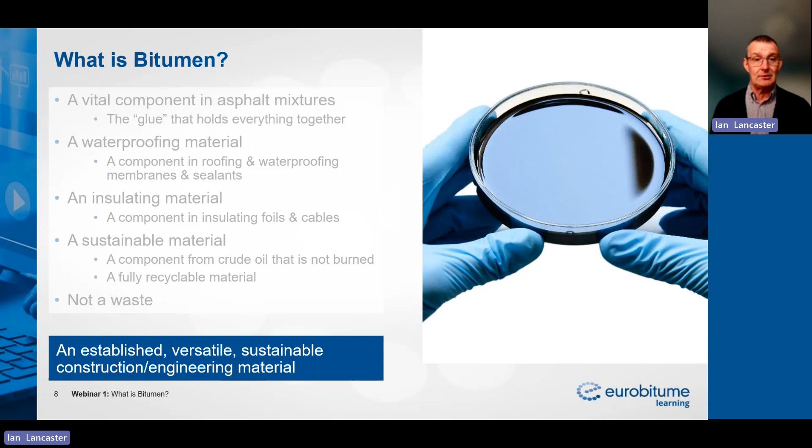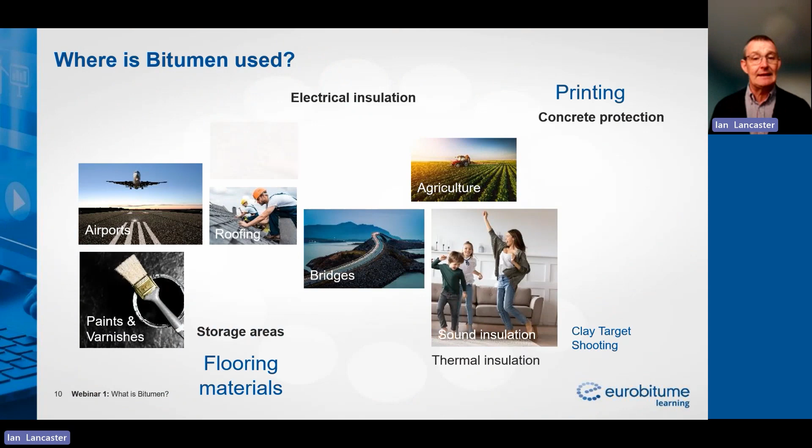Now I want to give you a flavour of where bitumen is used. I've already touched on some of the big uses of bitumen in paving, roofing and waterproofing membranes, and insulation. But you may be surprised just how much bitumen there is out there, where it is, and the sorts of materials that it goes into.

So yes, paving and bridges, a huge use of bitumen. Airport runways and standing areas, again, paving. We've mentioned roofing felts and flooring materials, but also sound insulation and pipe coating - bitumen provides fantastic levels of insulation for undersea pipelines, giving thermal insulation. It can be used as a briquetting and agglomeration material so we can compact wastes. It's used in wood protection - one of the very earliest uses of bituminous binders was to protect wood. So it's absolutely all around us, this fascinating engineering material. Everywhere you look around you in the environment, you will find bituminous products absolutely everywhere.

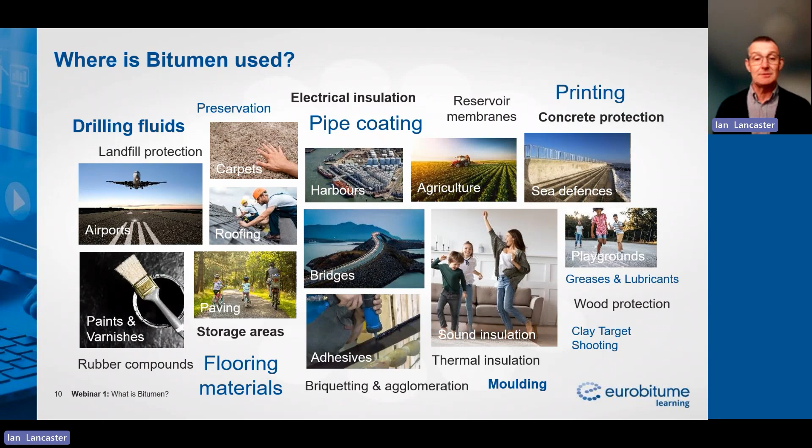But if we drill down a little bit, you can see just exactly where the big volumes of bitumen are, and that is in paving. It's approximately 85 to 88% of the total global bitumen demand goes into paving. And again, that reinforces the credentials of bitumen as a sustainable construction engineering material.

Roofing is the next highest consumer, roofing and waterproofing. And then we have those very niche applications that we saw in the slide previously, things like agglomeration, printing, pipe coating, wood preservation, even agriculture. But by far, the biggest single use of bitumen is in production of paving materials, whether that's surfacing materials or subsurface materials to give the road its strength and its engineering properties.

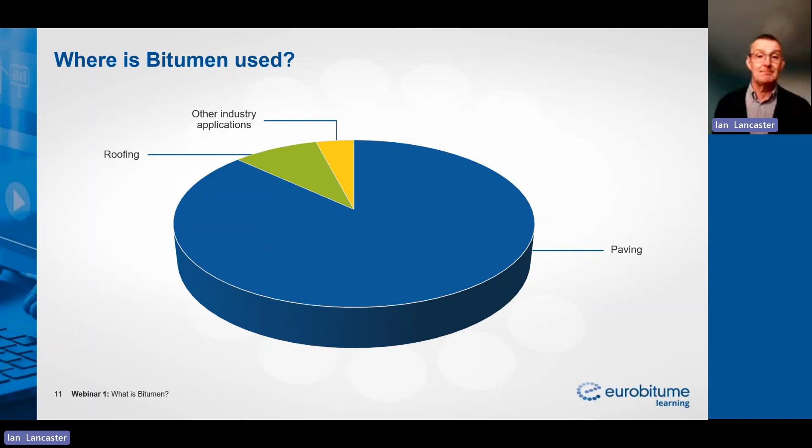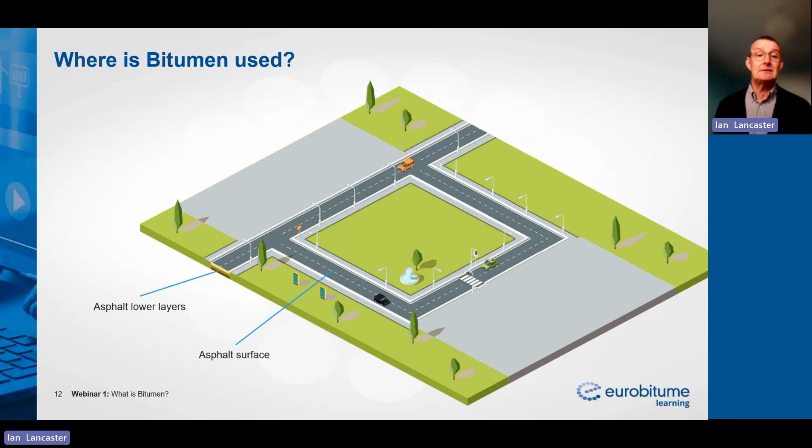So let's have a look around in a little bit more detail, just to reinforce that really. If we look at a model town, where might we find bitumen being used? Within our model town, we've just established a road, and most often that will be constructed using asphalt. We have asphalt lower layers, and we also have the surface, and those two types of materials are designed to do two different things. The asphalt in the lower layers is designed to give strength and resilience. The asphalt in the surface layer is there to give ride quality and to conduct water and noise away from the structure. So we find bitumen in those two asphalt layers.

What about when we start to build around these roads in our model city? Well, again, we'll find bitumen used in roofing membranes on both flat and pitched roofs. There, in the first case of a flat roof, to stop any penetration of water through the roofing or waterproofing membrane into the structure beneath. And on a pitched roof, it's there to conduct the water away while at the same time maintaining the integrity of the structure that's underneath.

We might find specialist applications, specially modified bitumen, special types of asphalt that require particularly newly designed properties for the bitumen to generate suitable properties for a car park outside of the building.

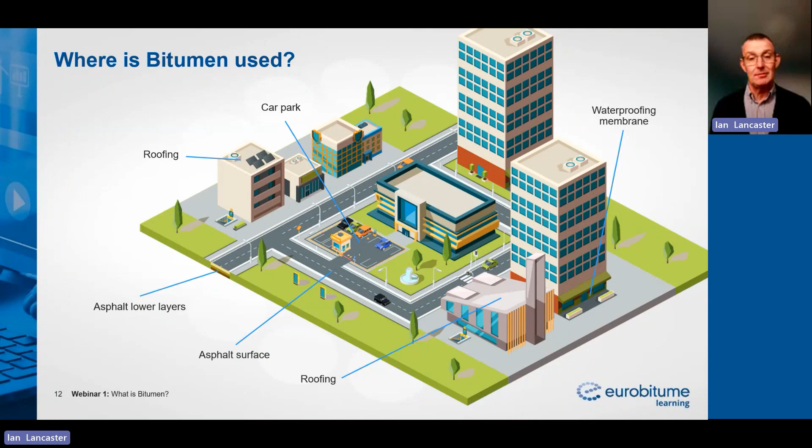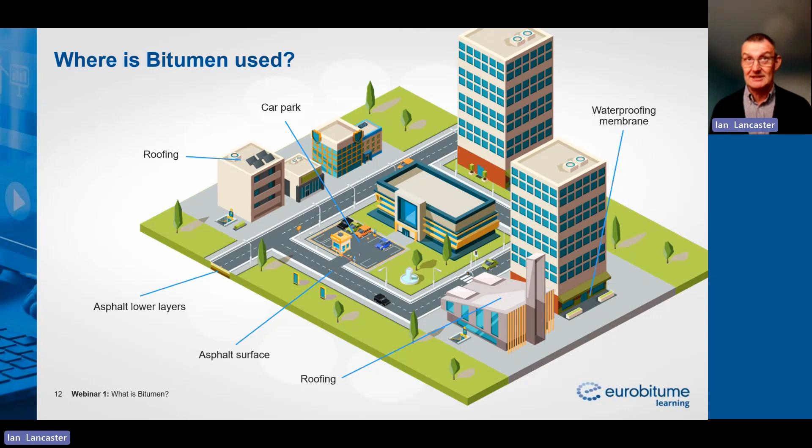And then finally, we'll find the bitumen in waterproofing membranes. And this is different. Here, what we're looking for the bitumen to do is to stop the water coming up and inside the building rather than penetrating it from above. And if the bitumen isn't capable of doing that, then we run the risk of the structures beneath starting to deteriorate. It's good that bitumen can do such a great job in preventing water ingress that it's used to protect these structures.

So how would we describe bitumen? Well, there are a number of different ways. If you go to any dictionary, you will find a typical description, and it's very vague. It will talk about a black to brown material, which is highly viscous, and it's obtained from the residue of processing suitable crude oils. And there's a key word there, and that's suitable crude oils. There are a number of different crude oil sources across the globe, but of those, not all are suitable for producing bitumen. So there we are. We have a very vague description of bitumen, and it doesn't tell us a great deal.

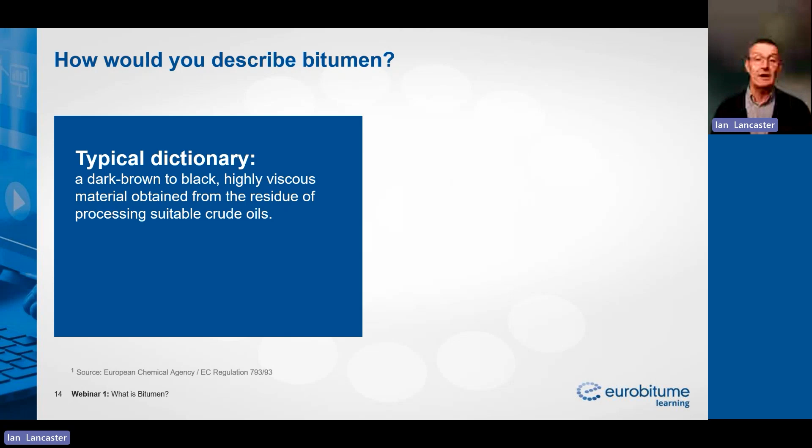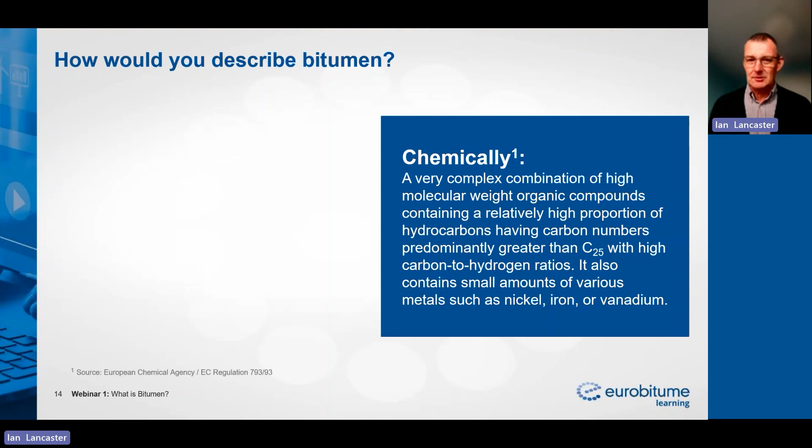We could look at the chemical definition. Here we're taking this from the European Chemicals Agency and the REACH regulation. And how that describes bitumen is a very complex combination of high molecular weight compounds containing carbon numbers greater than C25. That's a chain of 25 individual carbon atoms, or a ring of 25 carbon atoms, or a combination of the two, with a very high ratio of carbon to hydrogen. And it may also contain small amounts of metals, such as nickel, iron, or vanadium. That's the chemical definition. But if we were to run a little interactive session here, these are the words that would come up.

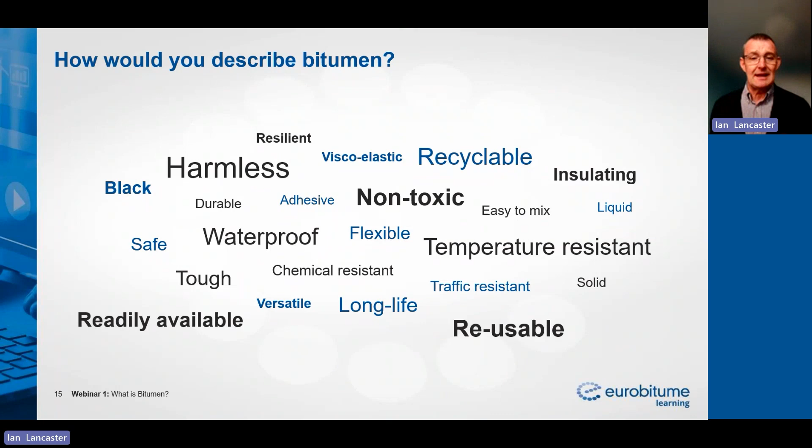I hope I've given something of a basic introduction there into what bitumen itself is, and now I want to move on to the second stage and talk about bitumen production methods. There are a number of different methods of producing bitumen, but for the purposes of today, I'm just going to concentrate on this very first one, which is atmospheric and vacuum distillation - still the most common bitumen production method worldwide. We're going to describe how this process works and what we get at the end of it. The other production methods we have on our radar to describe in later external webinars.

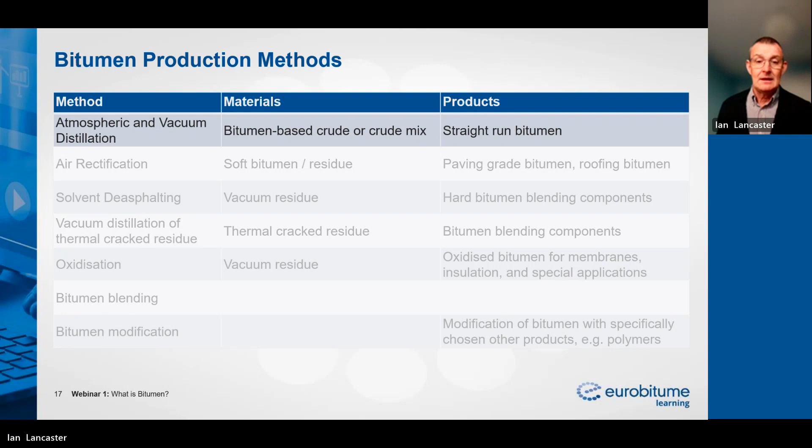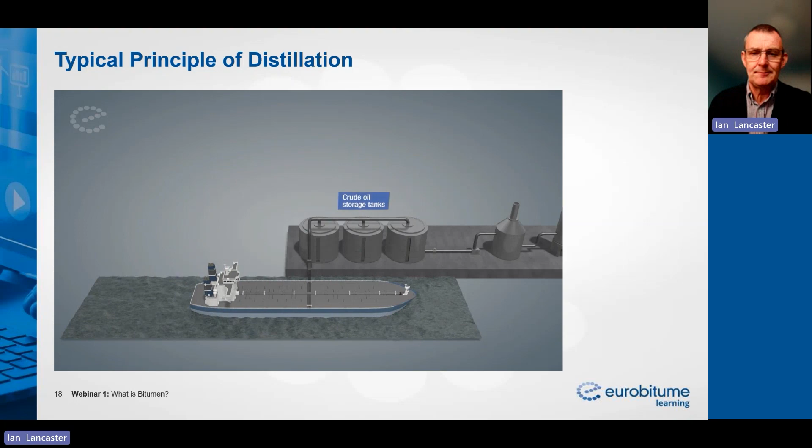Let's look at the principle of distillation. First thing that we have to have is our feedstock. So we can imagine a crude oil tanker comes across the sea and puts crude oil into some storage tanks.

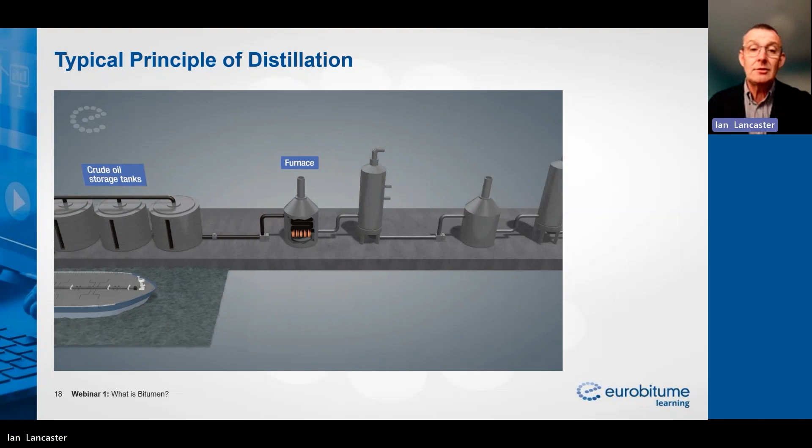From there, the crude oil is passed into a furnace, and the role of the furnace is to increase the temperature to around 300, 350 degrees and take some materials out. We're left at the end of that first column - if I can just pause perhaps. Let me pause, and I'm just going to go back ever so slightly.

So we heat our incoming crude oil in the first furnace to about 300 to 350 degrees, and we pass that into what's called an atmospheric distillation column. What happens in that atmospheric distillation column is some of the lower boiling point materials that are in crude oil start to evaporate, and they rise up the column and are removed and taken away for other products and other processes. We're left then with a residue, which we then pass into a second furnace.

The role of that second furnace is to increase the heat a little bit further, so we're looking typically 330 up to about 400 degrees. Then the residue passes into a second distillation column - this time it's what we call a vacuum distillation column. It operates under reduced pressure, and that allows the more high boiling point materials to be removed.

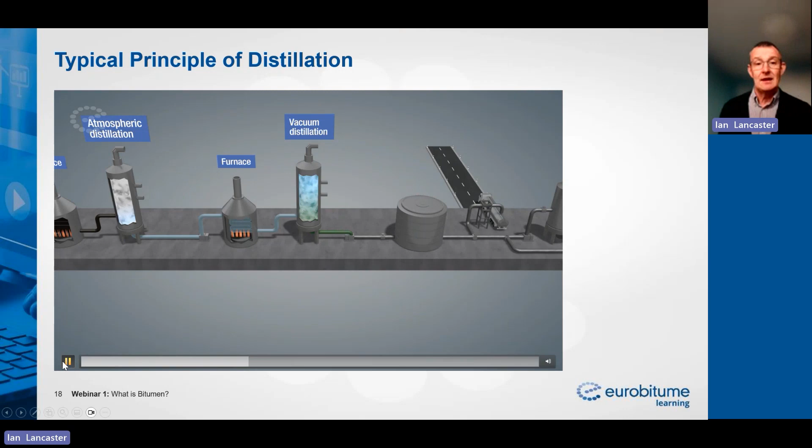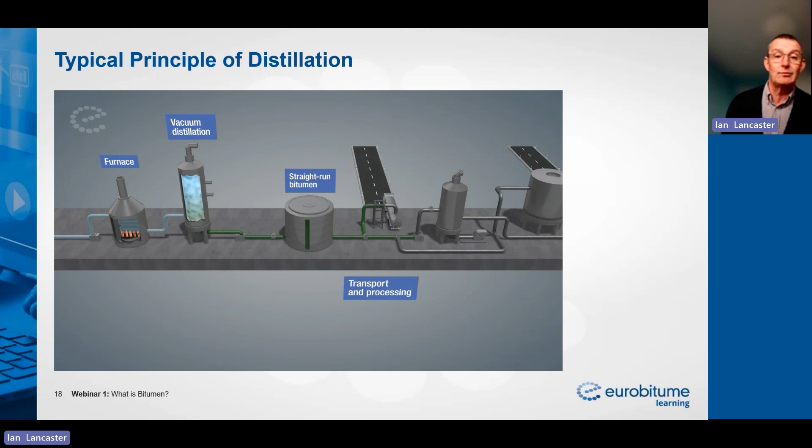And what we're left with at the end of that process is a straight run bitumen. We can take it from there and place it into a storage tank, and then we can deliver it out to customers in the asphalt or the waterproofing world. And that could be the end of the process, but it doesn't have to be.

There are other processes - we can take the bitumen and we can add polymers to it. So we can take our straight run bitumen and we can add polymers to it, change the properties, and then we can deliver a polymer modified bitumen. So we've changed the properties of it.

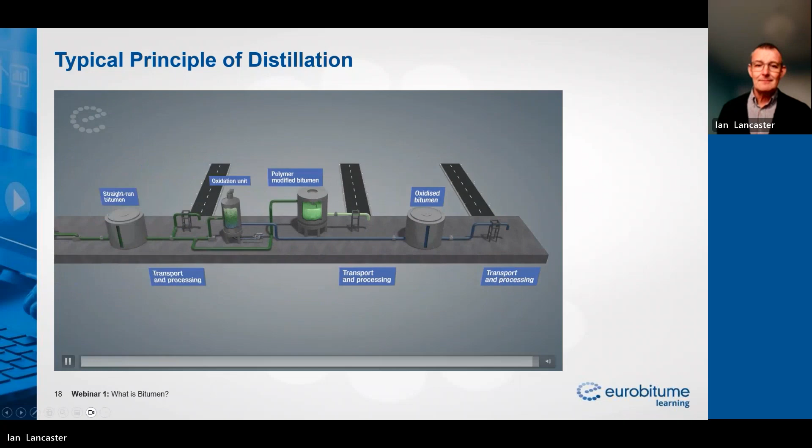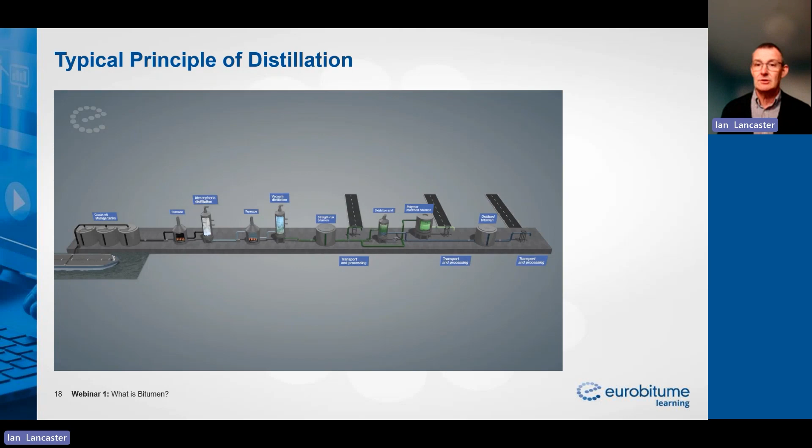We can also take that straight run bitumen and pass it through an oxidation unit to produce stiffer, harder, higher softening point materials, which are used in the roofing and waterproofing industry. That gives us our oxidized bitumen, which we can then transport and send out or subject to secondary processes. That's the sort of process that crude oil experiences from delivery to a refinery, being subject to atmospheric and vacuum distillation, and then some other secondary processes. But we're not going to talk about those secondary processes today - we're just going to focus on the distillation process.

So let me show a little bit more detail here and describe the distillation process in a little bit more detail. Our crude oil comes in from the tank and is passed into a furnace where it's heated to approximately 300 to 350 degrees.

It emerges from the furnace into the atmospheric distillation column, and the low boiling point materials rise up the atmospheric distillation column - they could be gases, light oils, distillates, kerosene, that sort of thing - and they're taken away to other refinery units. Our residue at the bottom of the atmospheric distillation column is then passed through a second furnace.

The temperature is increased again, and then we place it into a vacuum distillation column where we reduce the pressure significantly, and that allows the high boiling point materials to rise up that column and be separated out as distillates and oils. At the bottom of that column, we are left with our straight run bitumen. It's the vacuum distillation column that does the majority of the work.

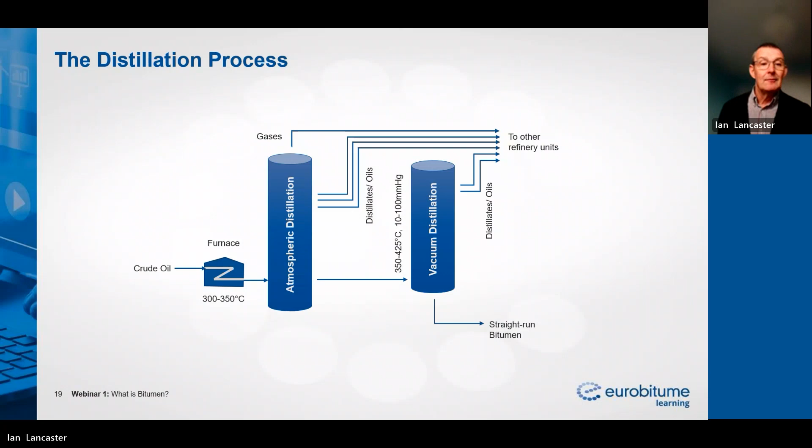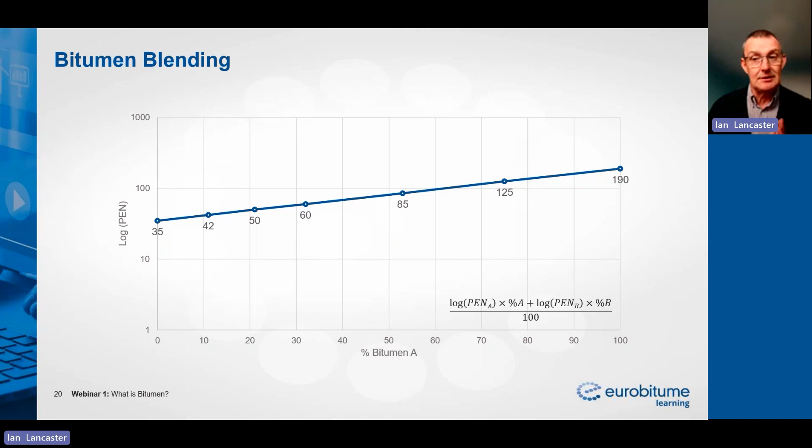I want to introduce a note of caution here, and this is very important: this blending graph and the equation at the bottom of the screen is only applicable to unmodified bitumens, and equally it's only applicable to materials of known origin. So if you've developed a blending chart like this for two different grades of bitumen of known origin, and you take a bitumen of unknown origin, it may well not follow those blending rules. It's very important to recalculate the blending chart and make sure all the rules you've established actually work. That's a critical takeaway: the blending chart is only applicable to unmodified bitumens, and only to materials of known origin.

Having produced our bitumen, we then have to have a means of specifying it, and we have a number of product standards within the EU covering all of the bitumen grades we want. The paving grade bitumen, EN 12591, covers those materials typically used in asphalt. Then we have a hard paving grade bitumen specification, EN 13924 Part 1, covering stiffer, harder bitumens used more regularly in those structural, subsurface layers of an asphalt.

And then we have a range of different specifications for other materials, such as oxidized bitumens, hard industrial bitumens, emulsions, polymer modified bitumens, and bituminous binders.

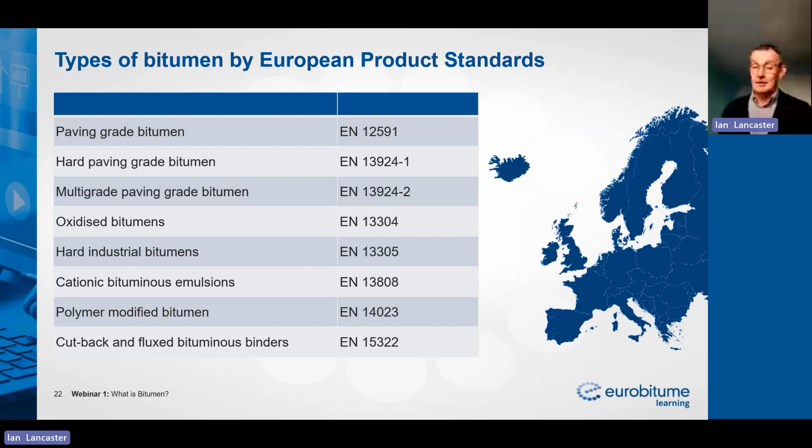It's important to remember that most of these specifications, these product standards, are based on what we call empirical properties - I'll come to that later. So they don't necessarily indicate how a particular bitumen will behave in a particular set of circumstances when it's in the construction works. But as an industry we are working towards developing specifications that will allow us to do that. It's a very difficult and time-consuming job, and we need to be absolutely certain that anything we propose towards performance testing will actually work. So we are working very hard on that.

To build a specification, we need to understand certain properties and behaviors of bitumen. First of all, we need to know how bitumen behaves at normal or ambient temperatures. The test we use for that is needle penetration. This is the oldest of all the bitumen tests - it's 134 years old, and it gives us a very basic measure of the stiffness of bitumen under very precisely defined conditions of temperature, load, and time.

So what we do is produce our sample of bitumen that you can see here. We condition that down, firstly in air and then in water, to 25 degrees Celsius. Then we bring a needle to rest exactly on the surface of the bitumen. We can't allow the needle to penetrate, and we can't allow the needle to be above the surface of the bitumen - otherwise we get a result which is false and not valid. So we bring the needle to rest exactly on the surface of the bitumen.

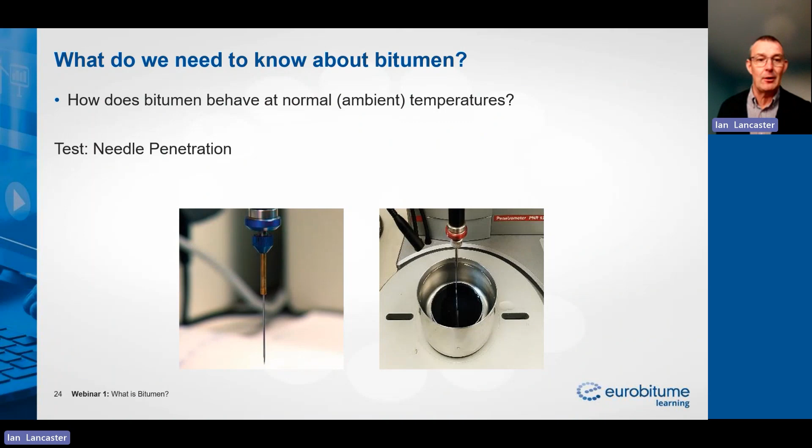We also need to know about how bitumen is going to behave at higher temperatures, because as we heat bitumen up, it becomes more fluid, and we can get to a point where the bitumen becomes completely fluid, and that's known as the softening point, more correctly, the ring and ball softening point. This is the second oldest test for bitumen. It's been in use since 1916.

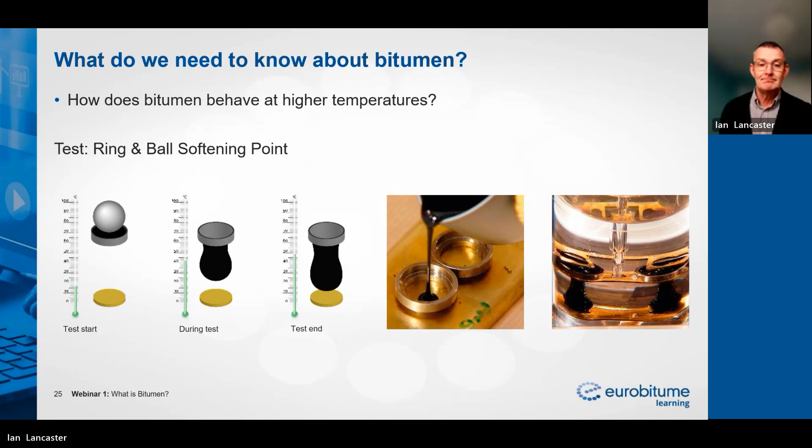It defines how we pump bitumen around a refinery, how we load bitumen from a storage tank into a delivery vehicle. It defines how we move the product from a delivery vehicle into the storage tank of, for example, an asphalt plant. It then defines the temperatures at which we will get effective mixing. It's so very, very important to understand about the viscosity of bitumen, because it affects everything that we do in terms of handling.

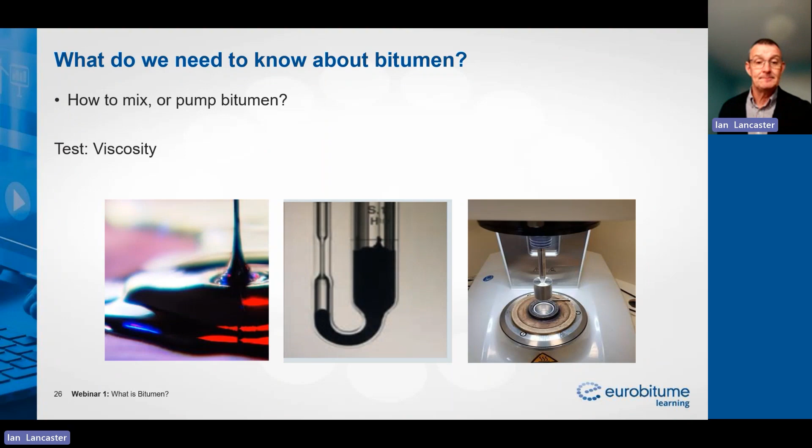Not specifically for today, I've just covered the very basic tests. When we do more of these webinars for the future, we'll look at some of the more sophisticated, some of the more performance-related tests, and how they can be used within specifications and what they mean for the bitumen itself.

And so at a later stage, there are other things that we will need to cover. We need to think about the aging of bitumen. It's an interesting material, because it's affected by heat and by air. Every time we move it about, we run the risk of incorporating heat and air and aging the bitumen.

What we need to know is how much the bitumen ages in those processes. We can measure aging on a short-term basis to give an idea of how the bitumen will be aged in, for example, an asphalt mixing plant. Or we can carry out long-term aging, where we try to simulate the aging that bitumen experiences in an asphalt material throughout its lifetime.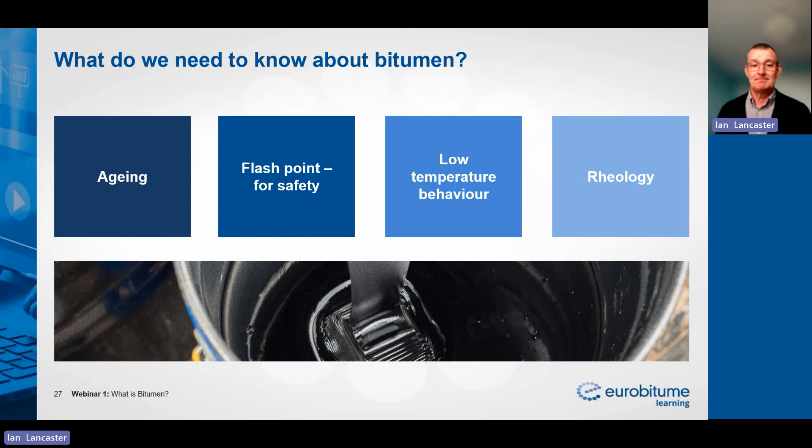So, in summary, what were we trying to do today with this first of our webinars? What I've tried to demonstrate is that bitumen and bituminous binders have got a very long, very rich, and very diverse history. They've been in use, depending on which historical sources you look at, at least since the late 19th century. And if you look at other historical references, they go back much further than that. So they have a well-established history.

But from our perspective, and from everyone else's perspective, we feel that bitumen, bituminous binders, bituminous materials have got an equally long future. They contribute to mobility. They contribute to protection of construction materials. So they will continue to contribute to the future.

I hope I've given you a flavour of just how versatile the material is, and what it does in terms of engineering, and how many different applications there are for bitumen and bituminous binders. It's not just asphalt. Asphalt is the biggest by a long way, but there are so many more different applications for this valuable, sustainable material.

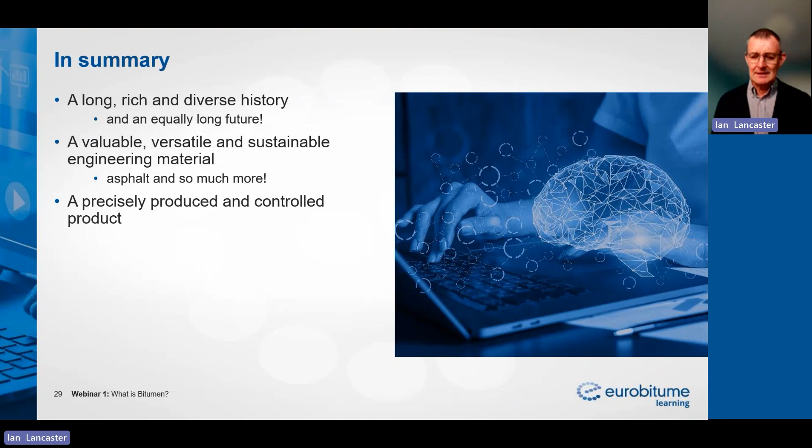And also, I've tried to stress that bitumens are not waste materials. They're precisely produced and precisely controlled materials. And if you put all of that together, I think the answer to the question, what is bitumen, is it's

a fascinating material. An absolutely fascinating material. I've spent nearly 30 years within the bitumen industry, and it still continues to fascinate me to this day. It will always throw some aspect of performance, or some property, that you haven't seen before. So it really is a fascinating material.